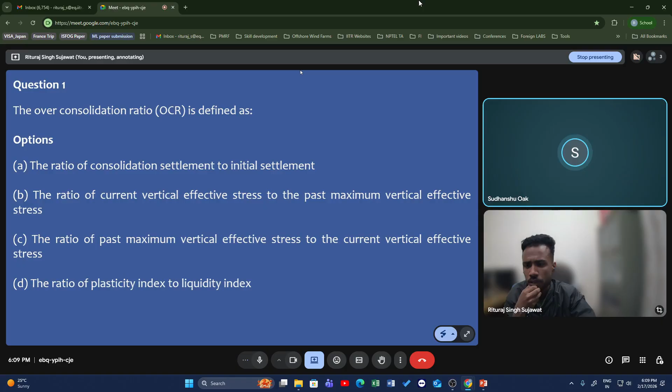Sir, is the answer C? Is it past effective stress to the current? I think so, yeah, let's check this. Yeah, so the answer is C.

Over consolidation ratio we generally define as how much the particular element of that soil has experienced the past stress, and what is the current effective stress it is facing. So it basically defines how much soil is tolerable to carry a certain amount of load, which depends on how much stress it has experienced in its past. To account for this phenomena, we use a parameter known as the over consolidation ratio, which is the ratio of the past maximum vertical effective stress to the current vertical effective stress. So the answer is correct, it's C.

Now in question number 2, you need to select the correct statement about the pre-consolidation pressure in context of soil mechanics.

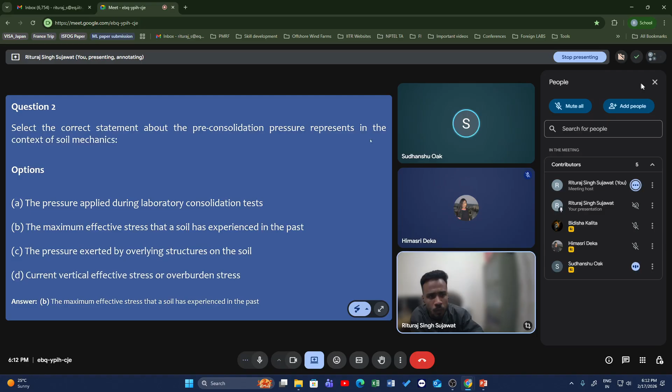So any doubt in this question number two? If not, then let's move to question number three.

It's a numerical based question. You have been asked: there is a top surface of 8.2-meter thick saturated clay layer which needs to be instantaneously covered with a 3.4-meter thick layer of fill material. The gamma bulk is given to you. If the clay has a coefficient of volume compressibility of 5.51 into 10 to the power minus 4 meter square per kilonewton and a saturated unit weight gamma sat of 19.6 kilonewton per meter cube, calculate the consolidation settlement of the clay layer due to the placing of fill material.

So you can solve this and ping your answer in the chat box. Within 5 minutes, we will discuss this.

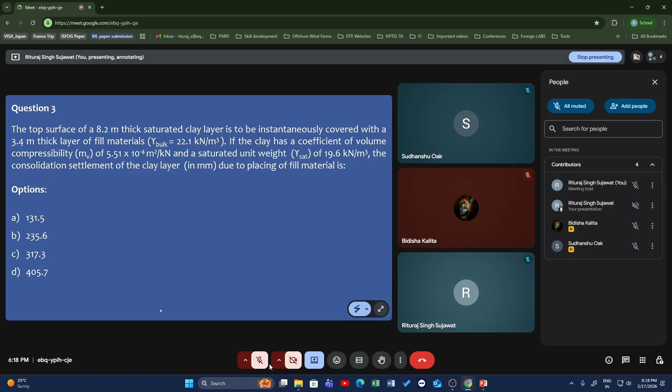Yes, guys, so let's check the answer. Do you have any answer from your end? Okay, then let's check this. Yeah, so the correct answer is 317.3.

So you have been asked that there is an 8.2 meter thick saturated clay layer, and it has to be instantaneously covered with a 3.4 meter thick layer of fill materials. So this is your fill material.

So the gamma bulk of the fill material is 22.1 kilonewton per meter cube, while the clay layer is having gamma... I think we don't require this, but we can still write it. So the coefficient of volume compressibility is mv equals 5.51 into 10 to the power minus 4 meter square per kilonewton, and gamma sat value comes out as 19.6 kilonewton per meter cube. So this is the fill material property, and this is the thick saturated clay layer property, mv and gamma sat.

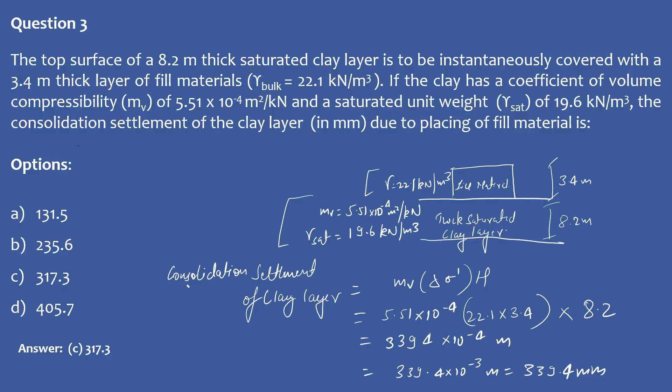Yeah, so I think we don't have any value corresponding to this exactly. We can go with the closest answer available, which is option C. So yeah, the correct answer is option C.

So this is the particular expression which you need to take into account for the calculation of the settlement of the soil layer due to consolidation, which is mv, delta sigma dash, into H. Okay, so this is question number 3. Let's move to question number 4. Any doubt in this, guys?

Not so, then let's move to question number 4.

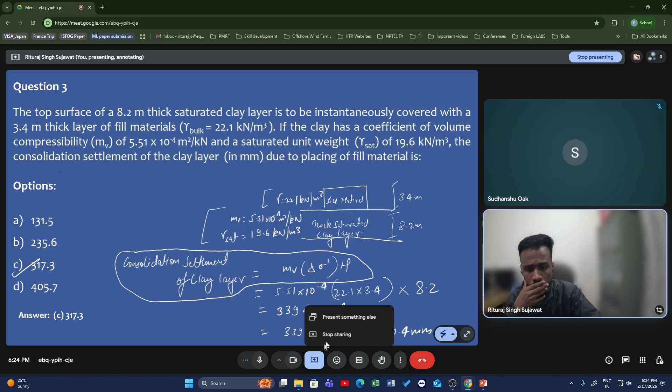In question number 4, you have been given that the pressure transmitted by a 3 meter by 3 meter size square footing on a cohesive soil with E as 5.24 into 10 to the power 4 kilonewton per meter square, with a mu value of 0.38, is 168 kilopascal. Considering the foundation to be a rigid foundation with IF value of 1.12, you need to evaluate what is the immediate settlement of the footing.

So you are having a 3 meter by 3 meter size square footing, with cohesive soil, elastic modulus given to you, mu value given to you. Assuming the foundation to be a rigid foundation with IF value of 1.12, you need to calculate the immediate settlement of the footing.

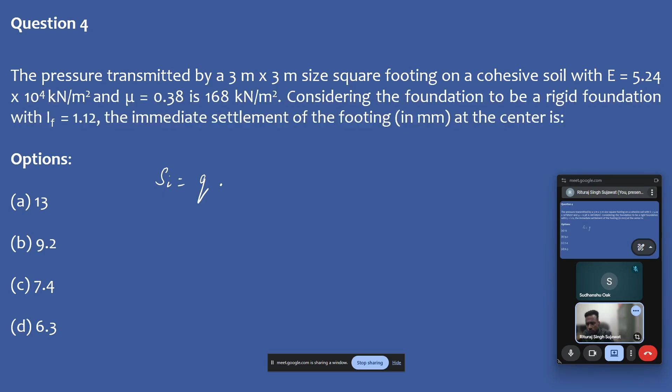Yeah, so we need to evaluate the immediate settlement. Let's check this. The immediate settlement of the footing is given by Q into B into 1 minus mu square into IF upon E. What is the Q value? Sir, Q value I'm getting is 168. Yeah, it's given in the question, right? The pressure transmitted by the footing.

The width of the footing is 3 meter, B meter, 1 minus mu square is 0.8556, maybe I'm directly calculating it. 1 minus 0.38 square. And IF value is also given to you, right? Yes, 1.12, upon 5.24 into 10 raised to power 4 kilopascal, right?

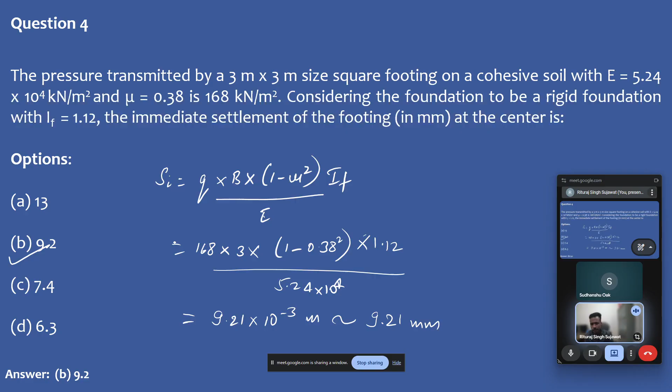So option B is correct. It's straightforward, you just need the expression for the calculation of immediate settlement, and you can take that thing. Okay, so is it all right? Any doubt in this? No sir. Okay, Sudhanshu, no worries.

So let's move to question number 5. You have been given an average void ratio of a 6.5 meter thick layer of normally consolidated layer as 1.05, and it has a coefficient of consolidation of 3 meters square per year and a compression index of 0.46. If the effective overburden pressure is equivalent to the increase in the vertical pressure caused by the foundation load on the clay layer, the change in thickness of the clay layer is to be found.

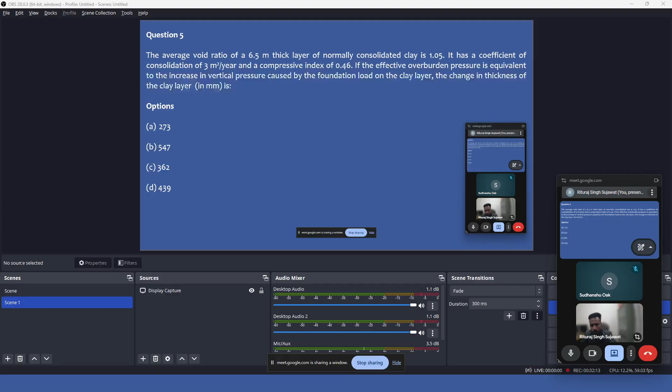Is answer D, sir? I think. Yeah, let's check. Yeah, so the answer is coming out as D. Let's have a look on this.

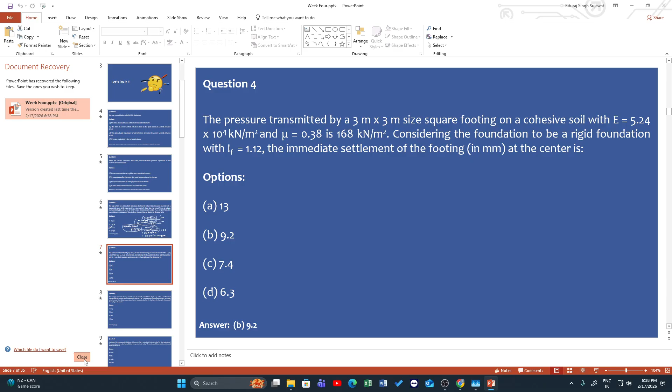Yeah, so question number 5 is there in front of you again, let's have a check on this. Yes, so the correct answer is option D, 439.

So the average void ratio given to you, E naught, is 1.05, and the thickness layer is 6.5 meter. Coefficient of consolidation is given to you as Cv equals to 3 meters square per year. Compression index Cc is given to you as 0.46, right? So let's calculate this.

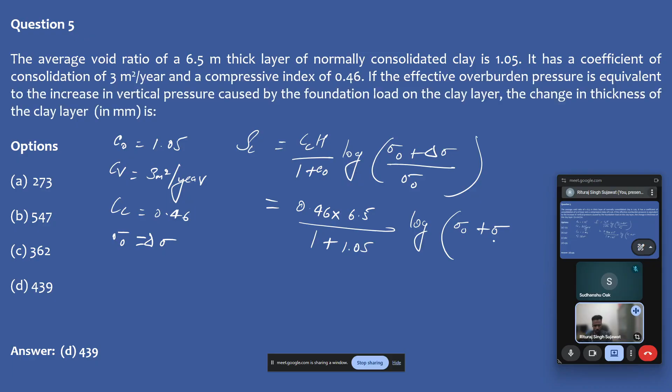So your settlement due to consolidation is given as Cc H upon 1 plus E naught, log of initial sigma with your increment in stress upon your initial sigma naught. So Cc, which is given to you as 0.46, and the height of the layer is given as 6.5, 1 plus E naught is 1 plus 1.05, and log term, since it is given that sigma naught equals delta sigma, your sigma naught plus sigma naught upon sigma naught. So this will come out as 0.46 into 6.5 upon 1 plus 1.05, into log 2. So let's check the answer.

Yeah, so this is coming out as 0.439 meter, which is your equivalent to the 439. So the correct answer is option D, 439. Any doubt in this?

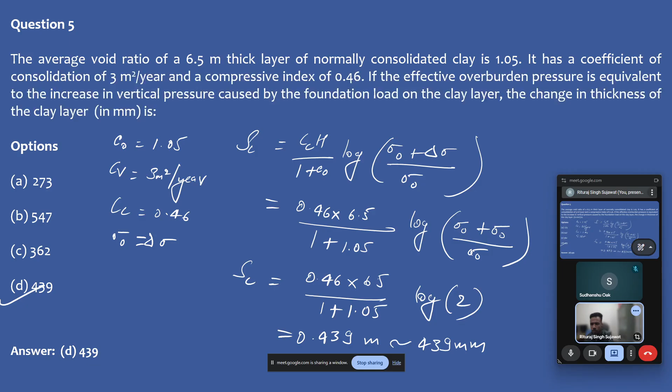Okay, let's move to question number 6. Now you need to calculate the total consolidation settlement in centimeters of the clay stratum. The properties of the clay stratum are given: it has a thickness of 6.1 meters. The natural void ratio is 0.962, and the final void ratio is 0.654. So what is the total consolidation settlement?

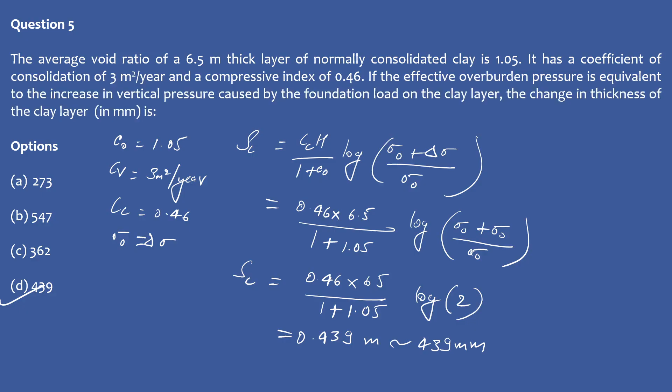So let's check the answer. It's B. So there's a direct relation between the settlement and your change in the void ratio, given as delta H by H equals to delta E upon 1 plus E naught.

In the question you have been asked to calculate the total consolidation settlement, delta H. Your change in void ratio is 0.962 minus 0.654, divided by 1 plus E naught, your initial void ratio which is given as 0.962, multiplied by the initial height of the soil, which is 6.1 meter. So delta H comes out to 0.957 meter.

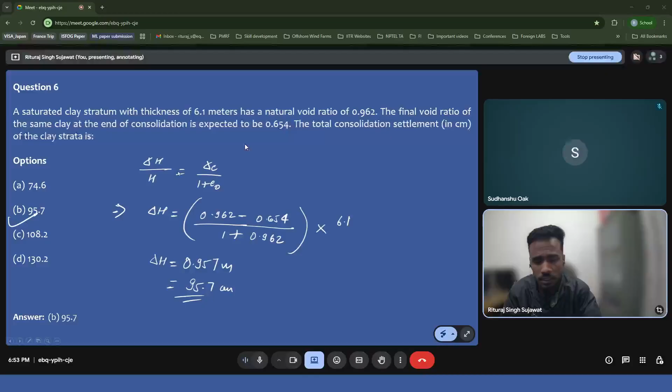So when converted, it's 95.7 centimeter, so the correct answer option is option B. Any doubt in this? No, sir. Okay, then let's move to question number 7.

From question number 7 to 9 it's a set of questions. Let's read the question first. You have been given a 3 by 3 meter square footing, positioned 3 meter below the ground surface in loose to medium dense sand, having a total pressure of 200 kilopascal at the foundation level. The unit weight of soil is 18.5 kN per meter cube. Use the equation ES equals to 2N meganewton per meter square, where N is the SPT number, computing the modulus of elasticity of the sand, and the depth of the compressible layer is 10 meter.

Assume settlement is required at the end of a period of 34 months. You need to use the Schmertmann's influence factor method. The SPT test conducted at the site gave the following N values: N equals 8, N equals 12, N equals 18. The influence factor at a depth of 1.5 meter below the base of the foundation is asked. This is the information given to you, and there will be a set of questions. First, you need to evaluate the factor at a depth of 1.5 meter below the base of the foundation.

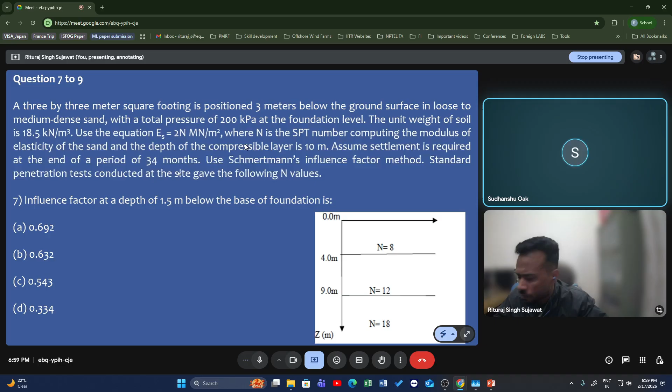Okay, so let's check this. What has been asked in the question? You have been asked to calculate the influence factor at a depth of 1.5 meter below the base of foundation. So the correct answer is B, and let's see how it's coming.

If you see the influence factor diagram, as per Schmertmann, this is how your influence factor diagram basically looks like. If this is a particular depth which has been given to you, this is the diagram. This is the maximum value of the influence factor which occurs at a depth of B by 2, and then it goes to 2B.

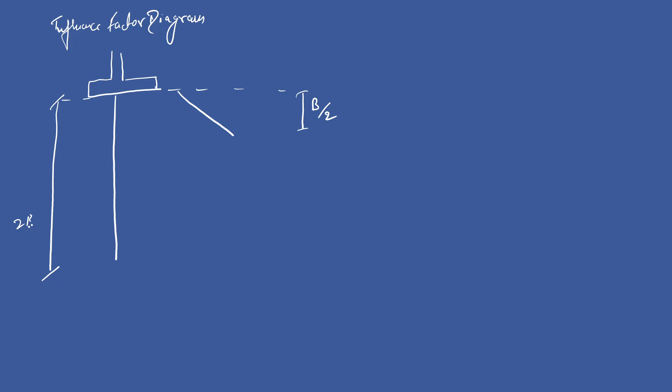For a square footing, or if strip footing, it will be B and 4B, I think. Yeah sir, I think it's from below that, no? 2B, like B by 2 should be 1.5 meter steps because it's 3 by 3. So we have to take it from B by 2 values, from below I think. From here you are saying to B, right? Yeah, I think maximum value se neeche. So how the Schmertmann diagram for the square footing is given, as Baidya sir might have given in the notes, right? Sir, the diagram is okay, but the value of 2B is I think starting from maximum value to the 0. Okay, let me check once.

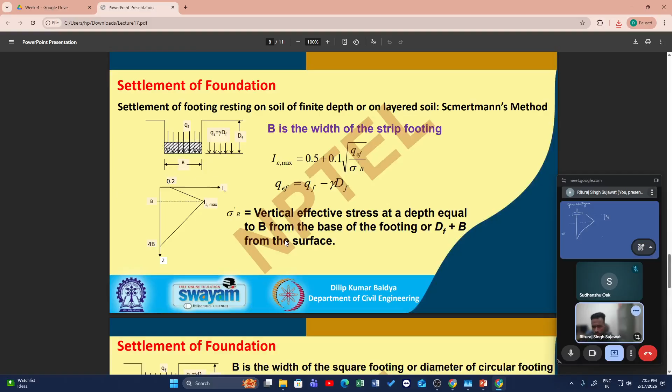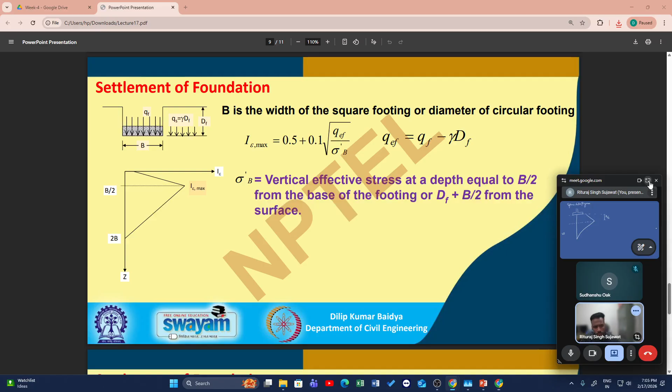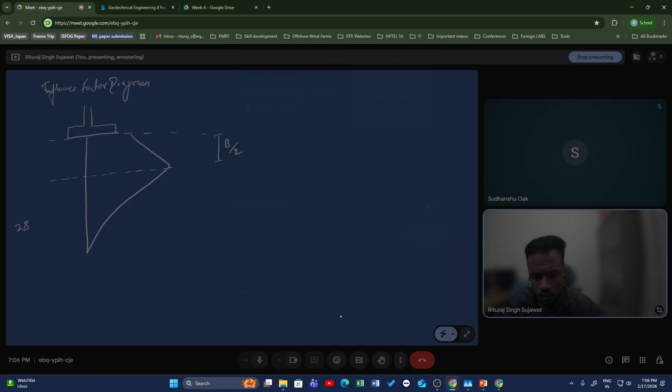So is it visible to you?

Yes sir. So I think that 2B is considered from the top, like from the base of the footing only, right? So your B by 2 is from the base of the footing, and the 2B is from further the base of the footing. But you are saying it's from here, right? I think so sir, yeah it might be wrong sir. The vertical effective stress at a depth equal to B by 2 from the base of the footing, or from the surface? Yeah, so I think we need to take this thing into account. No, it will be 2B from the surface. From surface it should be 2B, right sir? Like from the base of the footing, it will be 2. Base of the footing, sorry. Yeah, so this will be 2, right?

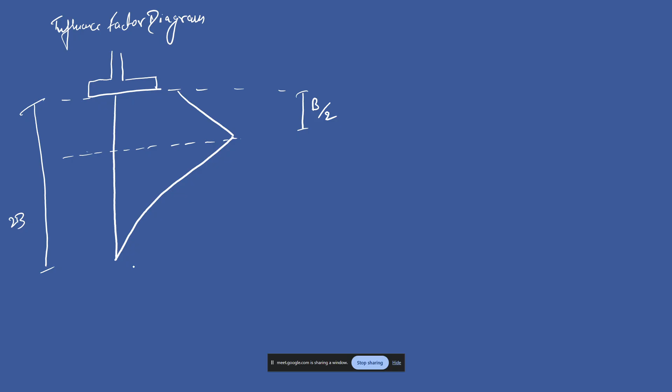So in the question, what had we asked? We need to calculate the influence factor at a depth of 1.5 meter below the base of the foundation.

So at 1.5 meter, B by 2 is your 1.5 meter, right? Yeah, at the max level. So basically, they are asking to calculate the influence factor, the maximum influence factor only.

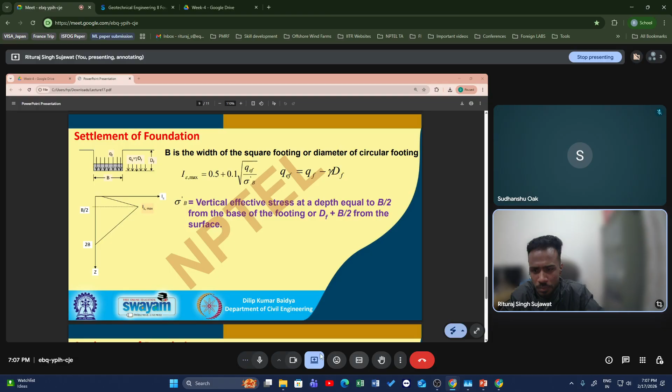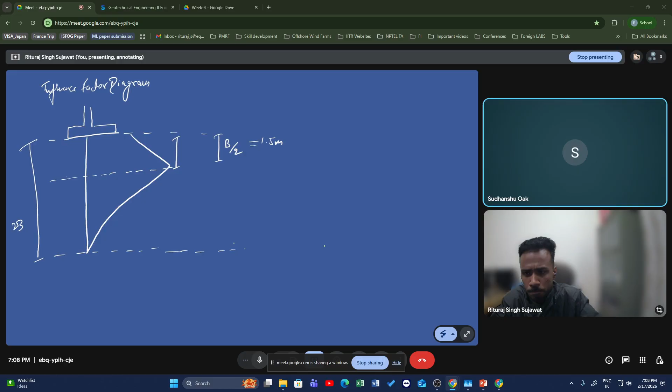So you need to calculate the I epsilon max, which is none other than 0.5 plus 0.1 times Q effective divided by sigma dash B. This is the formula.

Any doubt in this? Yes. Yeah, but sir, please ask. I'm a bit confused, sir. So in this, they are asking to calculate the influence factor at a depth of 1.5 meter below the base of the foundation, right?

Like we have to calculate for the maximum value, so we take 0.5 plus... They're asking us to calculate at 1.5 meter, and it eventually happens to be a maximum value. That's why we are using this particular relation to account for the maximum stress factor. So I have to use this formula to calculate the maximum I epsilon.

So since the question asked for 1.5 meter, and eventually 1.5 meter comes out as the position for the maximum stress factor, that's why you need to use this particular relation.

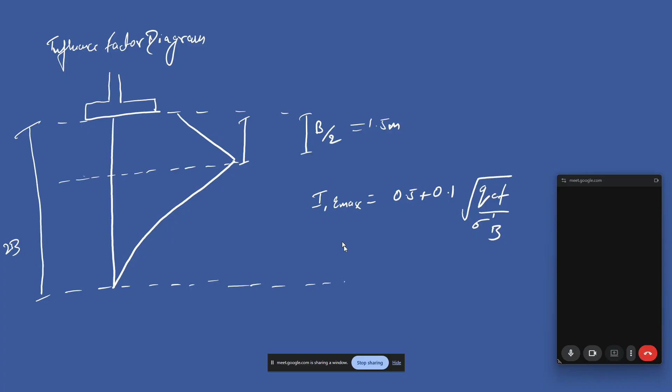0.5 plus 0.1 root of 2000, because Q upon gamma, our gamma is 18.5 into depth 3. So rho into df, 3 into 18.5 is... 1 minute, sir, 2000 upon 55.5, that will be...

0.254 into 0.1. So 0.025 plus 0.5 - no, no, no, sorry sir. Sorry sir, 0.525, it's the answer, I think.

I'm having a different answer with me. Okay, then let's check, mine one can also be wrong.

So how are you calculating the Q effective? Sir, Q effective, I am taking rho into effective depth. So 3 meter is the effective depth, and rho is 18.5. So 18.5 into 3 should be 22 point... sorry, 55.5, I think so.

Yeah, but you have already been given the surcharge load also, which is 200 kPa, with the total pressure at the foundation level. Sir, I thought it is ultimate Q, so I take it upper.

Actually you have been given the total load which has already been covered coming at the base of the foundation. So to calculate the effective load or effective stress, you need to reduce the surcharge from the total load. That will give you the Q effective. So whatever value you have calculated for the overburden, that value needs to be reduced from the total stress, which is 200 kPa given, minus 55.5.

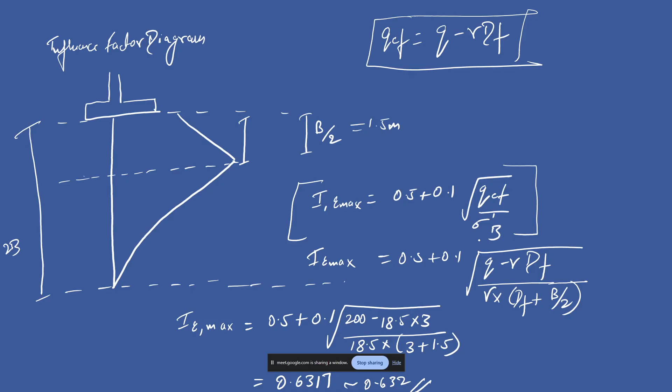And then sigma dash b is the effective stress at that particular position, where we are calculating the influence factor, and in our case it is at the position of b by 2. So anyways, your footing is embedded at a depth of 3 meters, right? And then further we are calculating at 1.5 meters, so it's gamma into df plus b by 2.

So gamma is 18.5 into 3 plus 1.5, and in this case your Q is 200 minus gamma 18.5, and depth of the foundation is 3 meters, right? So that's how we are calculating the maximum influence factor.

Okay, you can still ask if you are having any doubt in this. No, no sir, it's close to 0.63, so we have to take that, right sir?

Yeah, so the answer which we are getting is 0.6317, and it's closer to 0.632 as given in the option. So we can go for option B. Okay, so this was the first part of the first question of this question set.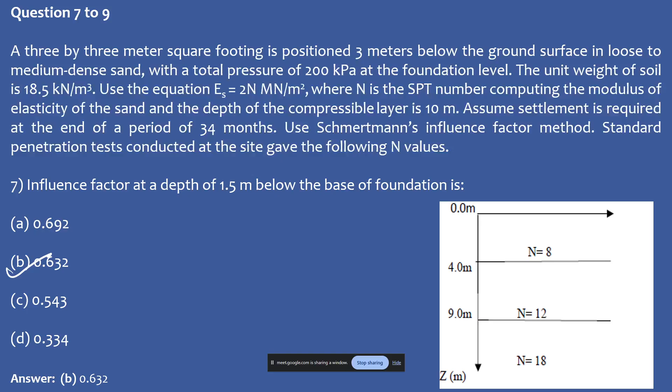And then we can move to the next question, which is question number 8. Now it is basically asking you to evaluate the influence factor at a depth of 4 meters below the base of the footing. Sir, we have to take two common means of both, so now you can interpolate it because when we interpolate, we know it's linearly varying at 2b, so now they're asking to calculate at 4 meters.

The question is visible to you, right? Yes sir, but I don't have options for that.

Yeah, in this I haven't given options. Just obtain the answer whatever you're getting. I'll further clarify that. Okay sir.

So let's go with this influence diagram only. Just have some tab I guess. One second, copy.

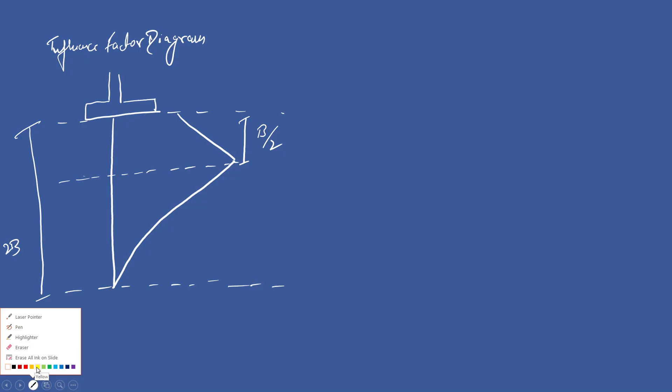So here is your b by 2, and if you see the influence factor values at this point, let's say at b by 2, your value is 0.632 and here your value is 0, right? So in the question they're asking us to calculate at 4 meters below the base of the foundation. So 2b means this particular depth is your 6 meter depth, and here is your depth at 1.5 meters.

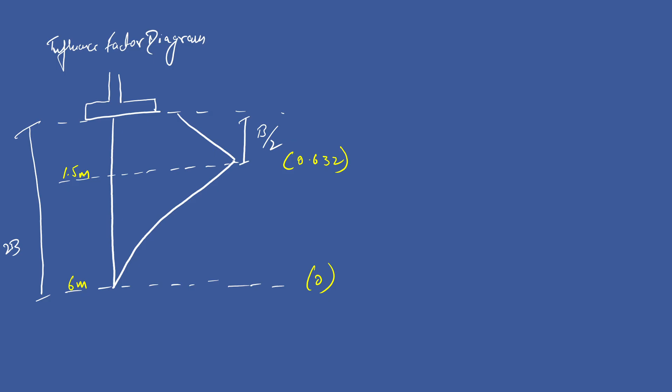So if I check this, 4 meters below the base of the foundation - that's what they're asking us to evaluate. So this is 1.5 meter, this is your 6 meter, and then there's another line. They're asking it's 4 meters, so this is your 4 meter. So from here to here, it will be your 2 meter, sir, right? I think I got one answer as 0.421.

Okay, you got it. Let's check in this case. So then we can go with the similar triangle. Since this is your 6 meter, this is 1.5 meter, so this total length will be your 4.5 meter, right?

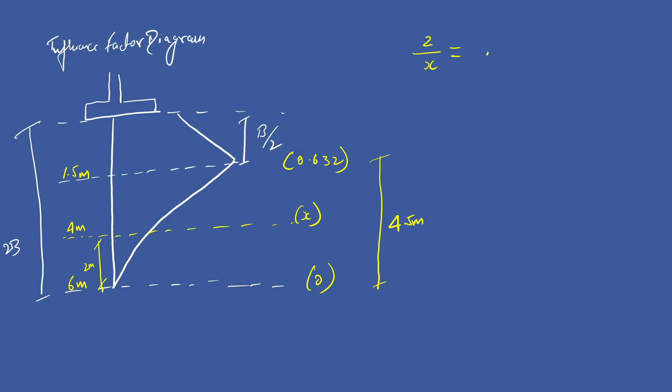If you go with the similar triangle, let's assume here your influence factor value is x. So if I go with 2 by x for the similar triangle, and here you will be having 4.5 by 0.632. So if I evaluate x here, I think we have to take x upon 0.63 is equal to 4 upon 4.5 - no, that's not the answer. You need to take it into the similar triangle.

So in this case, the triangle which I can see is this triangle - the total triangle. So this is the total triangle I'm taking. If you are having any other method, you can also use this. It's just geometry.

So 0.632 into 2, upon 4.5. So it's coming out as 0.28. So the answer which I'm having with me is 0.281 meter only. So the influence factor is 0.28. Take it as 0.4, so I got wrong answer.

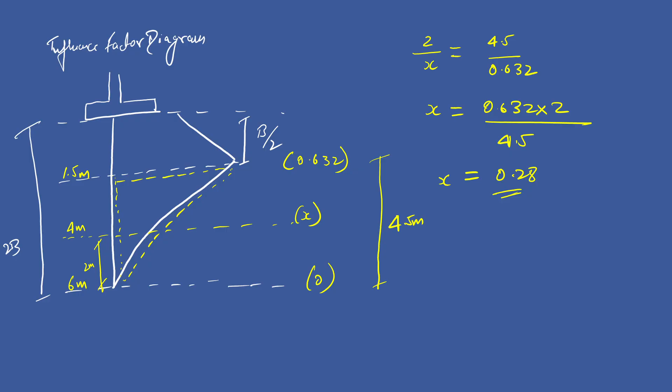Where have you taken the 0.4? Sir, I had taken four like total length. But x is equal to - you don't have any triangle here, it's basically a trapezoid. So I'm thinking the total triangle is for like 1.5 from 4 meters, so that can change. No worries, but now you got that right. Yes, sir. It's got double, sir, so that's why I got 0.42 and it will be 0.2. Okay, get that - it's coming out as double of this answer. Yes, sir, no worries.

Then let's move to question number 9. In this question, basically they're asking you to calculate the depth factor C1 of the foundation.

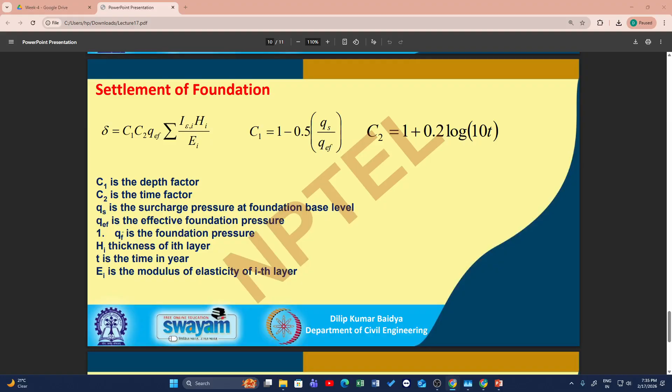So if I check this, your C1 - are the slides visible? No, sir. Okay, sorry. It should be 0.81, I think.

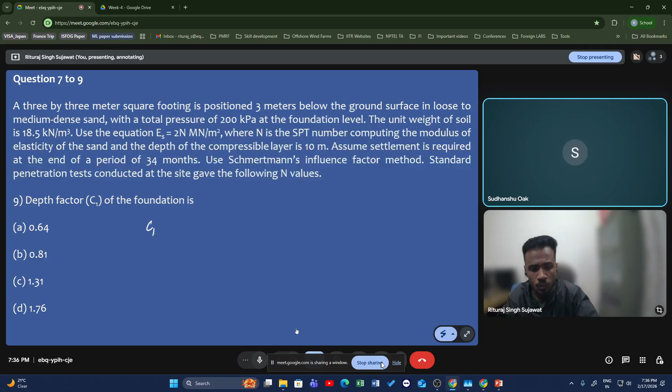Your C1 is none other than 1 minus 0.5 QS by Q effective. So your QS, if you see, is your effective overburden pressure, B by 2. QS is your surcharge or overburden pressure at that depth, at that foundation base. So that will be your gamma into df. Gamma which has been given to you is 18.5, and depth of the foundation has been given to you as 3 meter.

So it will be 55 point something. How much you are getting? 55.5. And then when we are talking about Q effective, that is none other than total pressure - your Q total minus QS. So your Q total is 200 kPa minus QS is your 55.5. So if I calculate this, it's 144.5 kPa.

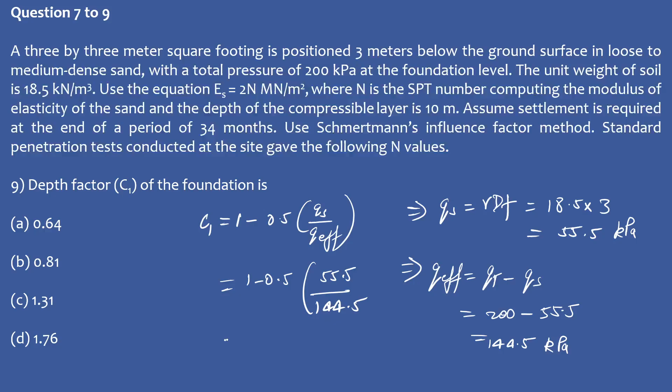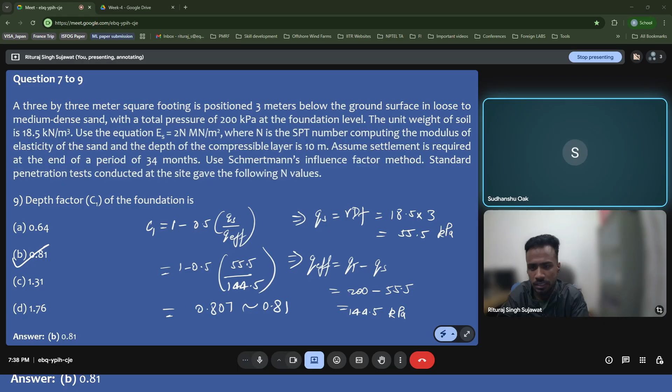So if I calculate C1, which is 1 minus 0.5 into 55.5 upon 144.5. How much you're getting? 0.8079. Yeah, so I think it is equivalent to 0.81, which is option B. So if you check this, the correct answer is option B. It's clear, right? Yes, sir, absolutely.

Okay, Sudhanshu, then let's move to question number 10.

This question is basically again the calculation of the primary consolidation settlement. The top and bottom of the normally consolidated clay strata, which measure 8.2 meters in thickness, were permeable layers. The initial overburden pressure in the middle of the clay layer is 308 kPa, while the clay's liquid limit and initial void ratios are 66% and 0.79 respectively. Due to the construction of a new building, this pressure increased by 115 kPa. What is the probable primary consolidation settlement of the building?

Perfect. Sir, presentation - yeah, sir. Yeah.

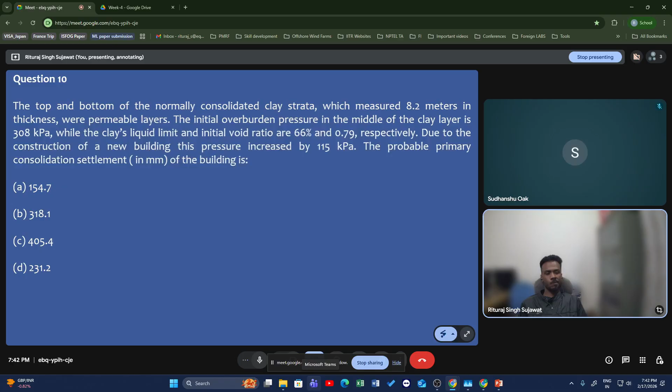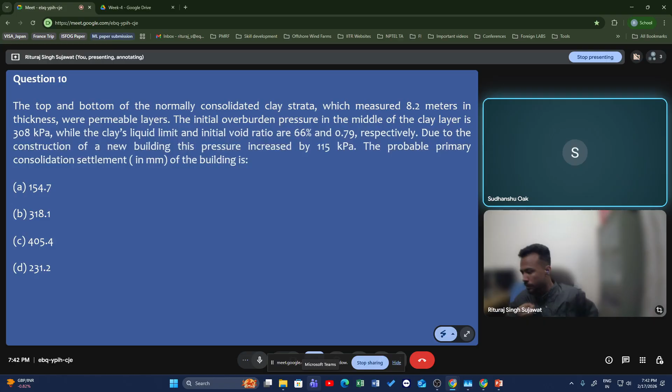Sir, option B, I think. You're getting option B, yeah. Okay, then let's check this. Yeah, it's option B. So how did you do that?

So in the question, they are asking us to calculate the probable primary consolidation. This is given by CC times H, 1 plus E naught, logarithmic to the base 10 of sigma naught plus delta sigma, upon sigma naught, right?

So have we been given CC? No sir, we have to calculate that. So we calculate it, right?

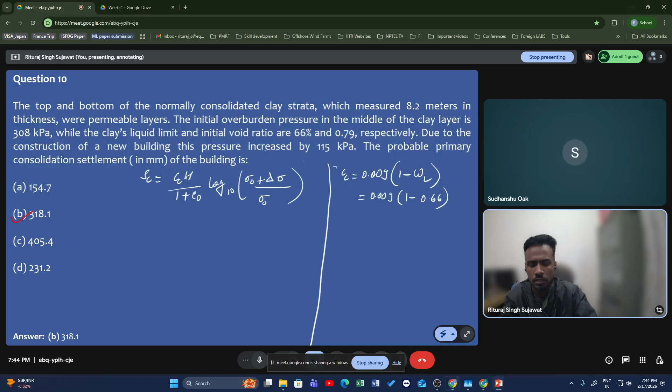The Atterberg limits are given to us. So liquid limit was 66 given. So CC is 0.009 into 1 minus liquid limit... so 0.009 into liquid limit minus 10, which is 56, so 0.66, so it eventually comes out to be...

How much is it? So 0.504. Actually, it's liquid limit minus 10, and you need to put it in percentage only. So 66 minus 10 is 56, into 0.009, which gives 0.504.

And the initial void ratio is given, E naught is equal to 0.79. The initial overburden pressure in the middle of the clay, sigma naught, is given to us, and delta sigma is also given, 115 kPa. Okay, then we can solve it directly.

I did 8.2, yeah. So SC equals CC, 0.504, into H, 8.2, upon 1 plus E naught. E naught is 0.79, how much is that?

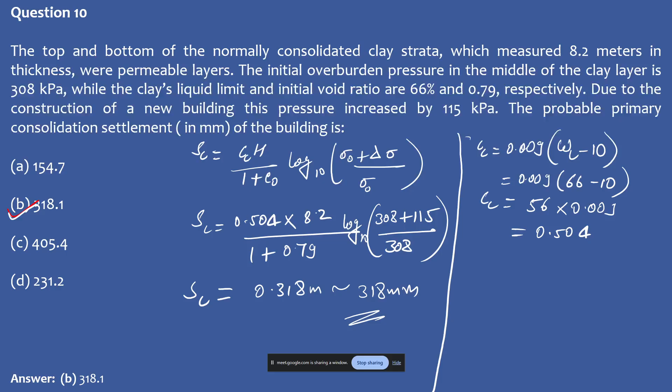So the only catch here was the calculation of the CC value.

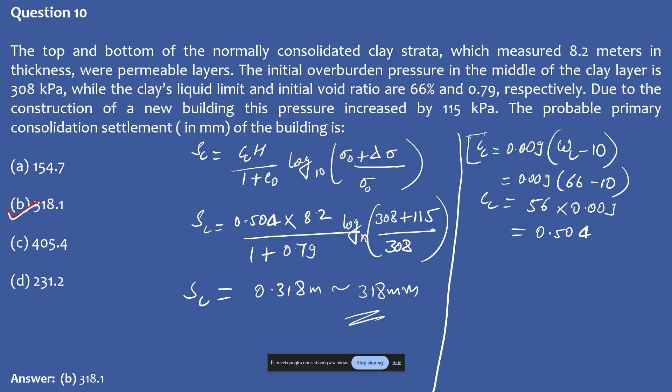Okay, shall we give some more time? Do we have one more? I think so. Yeah, we can solve one more question and then we can call it a day.

Yeah, you can solve this question number 14.

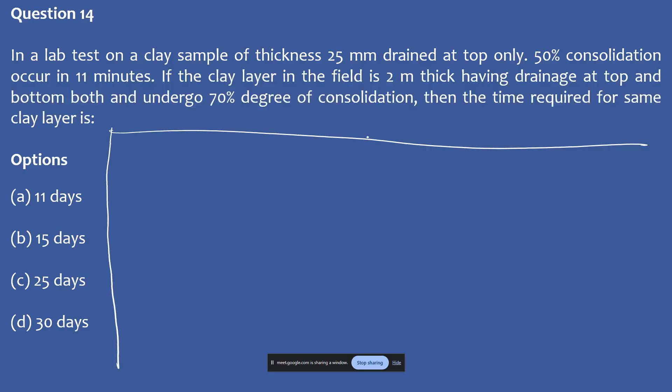So one, they are talking about the 50% consolidation case. And another, they are talking about the 70% degree of consolidation.

So basically in one case they have defined that they are having a clay sample which is 25 mm, and it is draining at the top only. So at the bottom you don't have drainage, it's only draining from the top part, right? And it is having 25 mm thickness.

So 50% consolidation occurs in 11 minutes. So your 50% consolidation is occurring in 11 minutes. So we need to take into account the degree of consolidation equation.

So we know that when your U is between 0 to 60 percent, you need to calculate the time factor with a formula which is pi by 4 times U by 100 squared, where U needs to be inserted as a percentage.

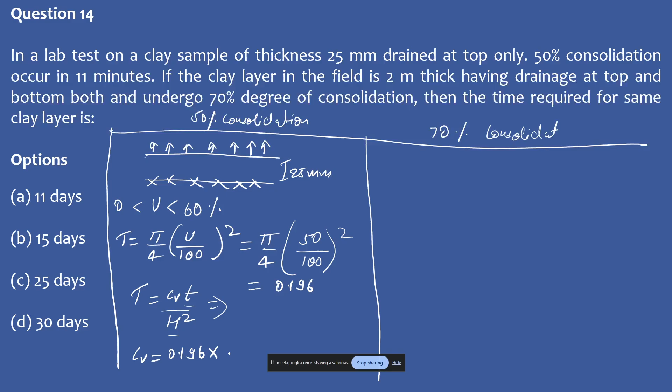So now calculate your CV: 0.196 into your H square. How much is your drainage path? It is draining only at the top, so we take the whole soil layer depth into consideration, that is 25. So CV equals T into H square. H square is 25 mm, so if I take this into meters, yeah.

I think we need to do the conversion also, because CV is 0.196, and your time is given as 11 minutes, and your H is 25 mm. No worries, then we can calculate this directly in minutes, and then convert it into days.

So H square is 25 mm square, and your T is 0.196, sorry, your small t is 11 minutes. So if I calculate this, how much am I getting? 0.196 into 25 square, answer divided by 11. You will get this as 11.14.

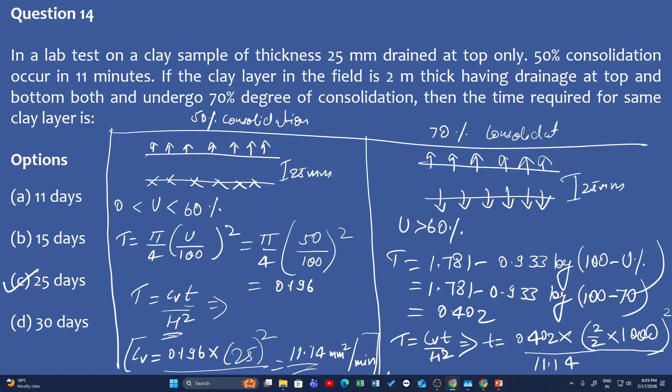So any doubt in this, Sudhanshu, Sumant? No, sir. Okay then. Sir, just I've got a doubt with that formula.

I don't know this time factor formula. Oh yeah, so you can check in the lecture notes where they might have derived the one-dimensional consolidation theory. So there the formula has been given, the time factor formula. Okay sir, I will recheck it. Yeah, you will cross verify. You can cross verify. Okay.

So if you are having any doubt, we can discuss. Else, let's call it a day.